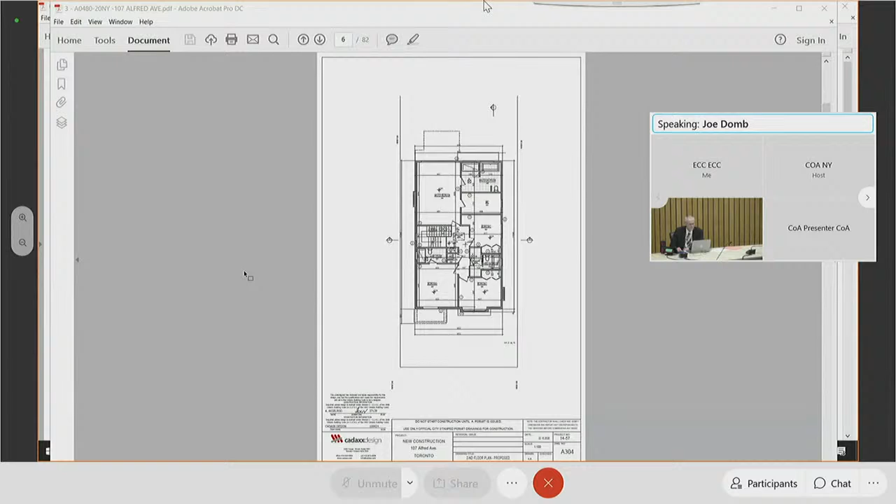The side main wall height, variances 3 and 4, was reduced from 8.5 meters to 8 meters, consistent with approvals on the street, for example at 164 and 174 Alfred, both of which have higher approved side main wall heights at 8.19 meters and 8.82 meters respectively. The third story variance, number 2, is technical in nature and will appear visually consistent with the streetscape as a 2-story dwelling. Planning agrees with this assessment, as stated in the planning staff report on file, and they have no objection to the variances proposed.

219 Hollywood Avenue, the street directly north, is an actual 3-story dwelling that was approved. The rear deck variance pertains only to a half-meter portion extending into the rear yard setback, and the deck does not have a variance pertaining to height or side yard setback. Nevertheless, the owners would like to put privacy screening around the deck to mitigate any privacy concerns from 109 or 105. The owners feel the variances for the proposed dwelling are minor in nature, with very little additional impact over what can be built as of right.

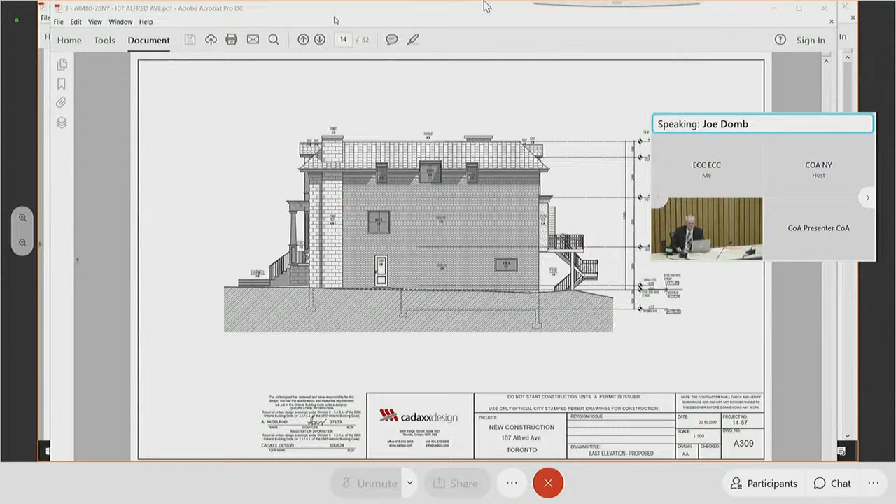I'd be happy to answer any questions you might have. Okay, thank you, sir. I'll go to the committee. Does the committee have any questions of the speaker? There being none, I'll move to our next person on the list.

I have Guy Tai Cho from 105 Alfred Avenue. Are you there, sir or madam? Hi, yes, hello. Can I get your full name and address, please? My name is Guy Jo, 105 Alfred Avenue, North York.

Miss Monica is supposed to represent us because my English is not fluent enough to represent my ideas in the best way. So if Monica can represent us, that will be the best to address my concerns. Mr. Chair, if Mr. Guy Tai Cho would like, we can put Monica on to speak on behalf of the neighbors. Yes, okay, that's fine.

Ms. Monica Goyal, are you there, madam? I am here, good morning. Can I get your full name and address, please? My full name is Monica Goyal, last name Goyal. My address is 201 Queen Street East, Toronto, Ontario, M5A1S2.

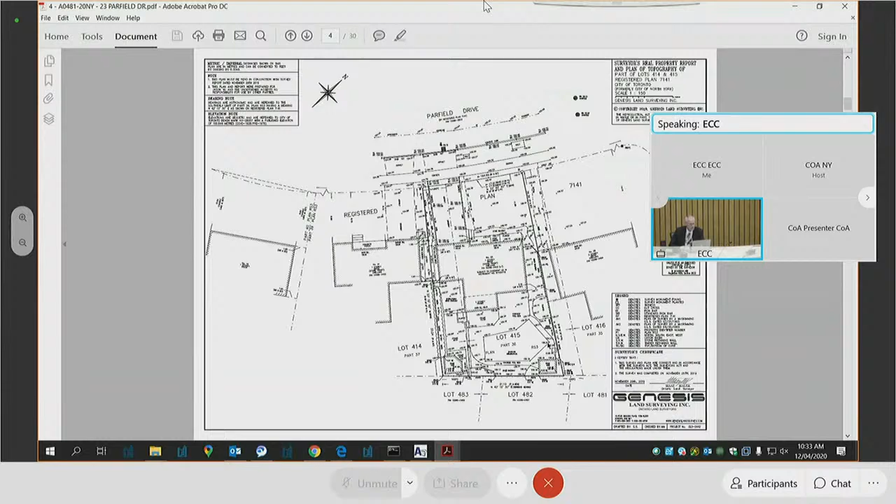Okay, thank you, sir. I think it's pretty clear what you're asking for. We have one variance before us relating to the west side yard setback. I noticed that there are no persons registered to speak on this item and no staff comments or recommended conditions. I'll just ask the committee if it has any questions or comments, or if it would like a presentation.

There being none, could I get a motion on the application, please? Mr. Khan, it's a minor variation, so I would like to move it to be approved. Someone to second Mr. Khan's motion? Mr. Kidd seconds. All those in favor? That motion carries unanimously. Mr. De Oliveira, your application's been unanimously approved without condition. Thank you very much, have a good day.

Item number 454 St. Clements Avenue. I have one person registered to speak, that is a Drew Laszlo. Are you there? I am indeed. Good morning. Yes, hello sir. Can I get your full name and address, please? Drew Laszlo, 3317 Yonge Street.

Thank you, sir. Pretty clear what you're asking for on the two variances we have before us, one for side yard setback and the other for the main wall height. I think the committee is pretty clear what you're asking for. I note that there are no staff comments or recommended conditions posted with this application. I'll just ask the committee if it has questions or comments or it would like a presentation.

There being none, could I get a motion on this application, please? Mr. Kidd? Thank you, Mr. Chair. In my opinion, the requested variances are minor in nature. I'd like to put forward a motion to accept the application without condition. Thank you, Mr. Kidd. Someone to second that motion? Mr. Hunt seconds. All those in favor? The motion carries unanimously. Sir, your application's been unanimously approved without condition. Thank you very much. Thank you, sir.

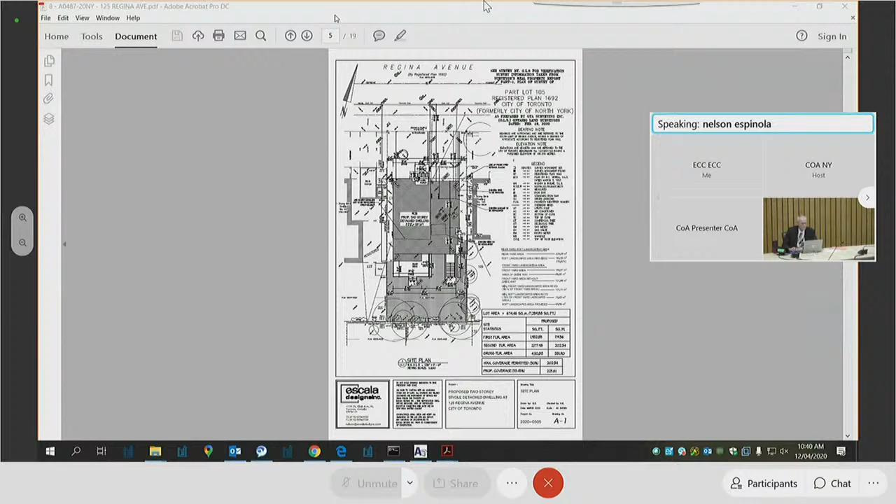I would like to point out that in terms of side yard setbacks and coverage, we're very much in keeping with what's been approved recently by the committee. There was an application at number 123 Regina, right beside us, which was approved with similar setbacks and coverage.

In terms of building height, we do not comply with the old zoning bylaw, and that's due to the fact that the crown of the road is actually 0.6 meters below the existing average grade. This is why we have a variance in regards to height.

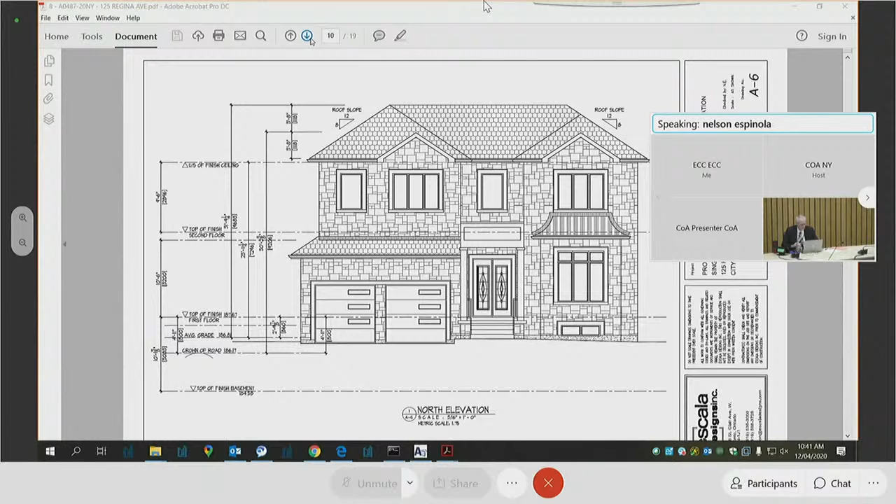But with regards to the new zoning bylaw, we are within the 10-meter maximum height. So I think that our variances are minor in nature, and again, in keeping with what's been approved in the area. Okay, thank you, sir.

I'll just ask the committee if it has any questions of the speaker. No questions. I have one person registered to speak on this item. That's Maria Gentile. Are you there?

Yeah, Mr. Chairman. Yes. Hi, madam. Can you please give us your full name and address, please? My name is Maria Gentile, and I live at 127 Regina Avenue, Toronto, M6A1R8. Okay, thank you, madam. If you could give us your comments on this application.

Basically, I just have objection to the height and the length and also the coverage of the whole house. I live next door, and I've lived there for 47 years, which is most of my life, and I don't plan to move anytime soon.

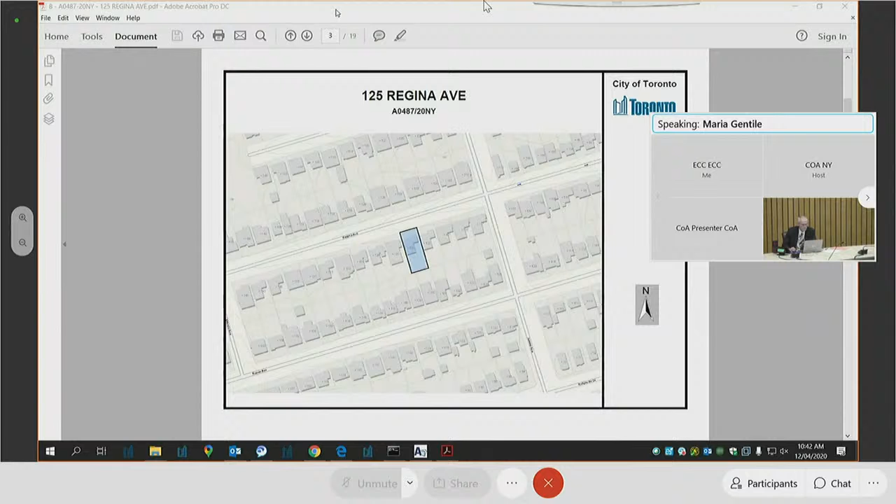The house next door to me would be at least 3 times as big. My house is about 1,800, and I see that this proposed house will be 4,110 square feet, pardon me.

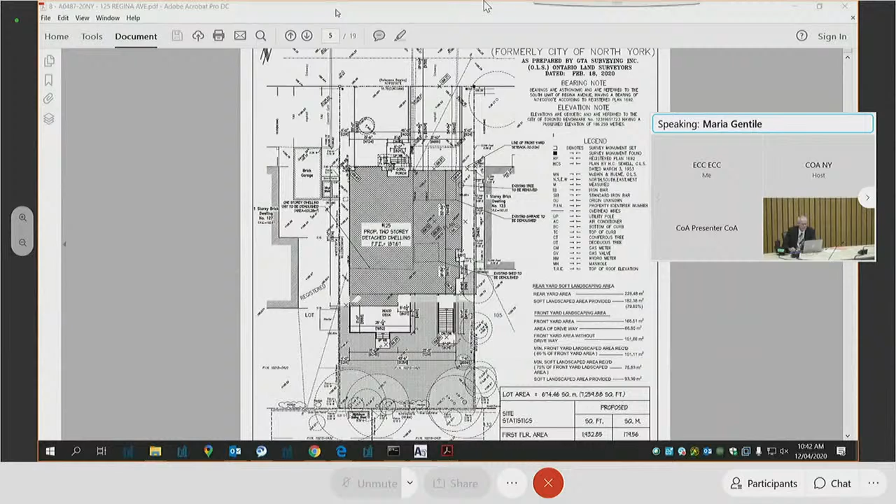That would impede a great deal, especially because they would like to move their yard on the west side closer to mine. We have a side patio on my east side, which is their west side. We use that patio quite frequently in the summer. My family enjoy the sun there.

We've planted roses for 47 years. We've had these roses there. We also have a vegetable garden, which would be overshadowed, needless to say, by the length of the house and the size and height of the house.

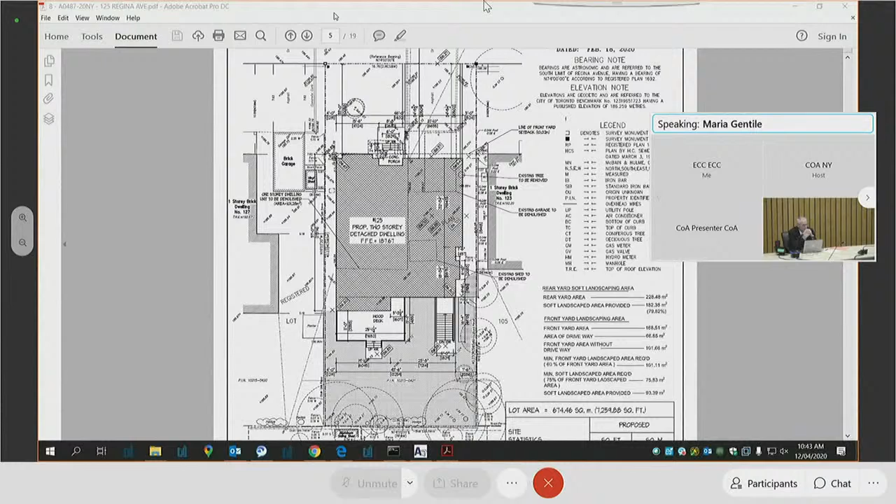We've always lived in the shadow of this big giant willow tree that they've had in their backyard. The former owner didn't exactly cut down any extra deciduous trees that grew, so the back of the property is full of these deciduous trees.

The willow tree for years has been sucking the water out of our garden. For the first time, when they cut it in January, we breathed a sigh of relief. And for the first time in many years, we've had a decent crop of whatever vegetables we planted.

So those are my objections. The overshadowing of our side patio would greatly limit our enjoyment of our backyard. The height would overshadow the morning sun. Nothing would come on our patio.

Basically, that's what we have in opposition to this big giant house. It takes up most of the land, and it's too big for the size of the lot.

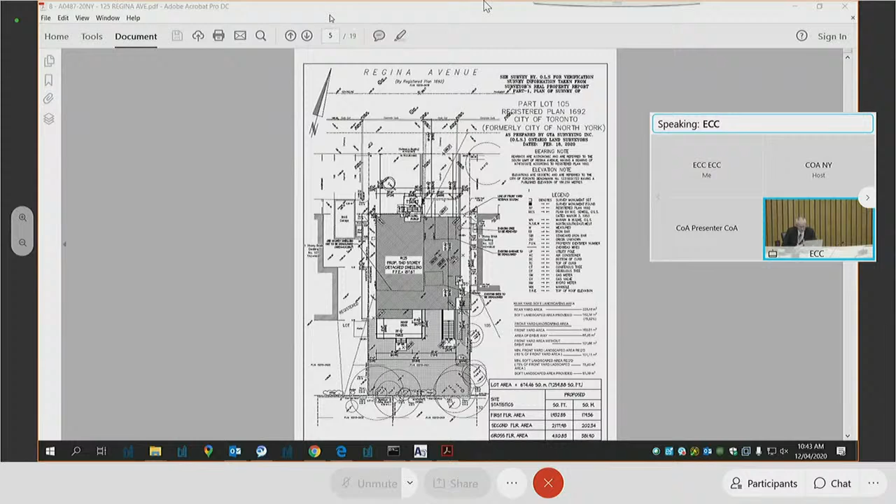Okay, madam, thank you. I just wanted to mention that the height, there is no height variance under the new City of Toronto bylaw. The only height variance they're asking for is related to an old North York bylaw that's effectively obsolete. I just don't know if you were aware of that. Other than the height, what they're proposing currently complies with the new City of Toronto bylaw.

No, I did not know that. Okay, thank you, I just wanted to mention that. Does the committee have any questions of the speaker? Being none, we'll go back to Mr. Espinola. Sir, are you there?

Again, in regards to height—yes, sir. Can you—you have already mentioned that. Do you have an opportunity to address the concerns raised by the previous speaker?

Certainly. As I was saying, with regards to height, we are in compliance with the new zoning bylaw. And with regards to the old bylaw, as I mentioned previously, the crown of the road is presently 0.6 meters lower than the average grade.

This is the reason why we're not in compliance with the old zoning bylaw. With regards to the side yard setback, the existing house is presently located at 1.2 meters approximately, so we're not reducing the side yard setback. It's presently 1.2, and we're maintaining that side yard setback.

With regards to length, we're slightly over, but for the most part we are within the 17 meters. It's only that little one-story addition at the back that brings us over the 17 meters, but for the most part we're within 17 meters.

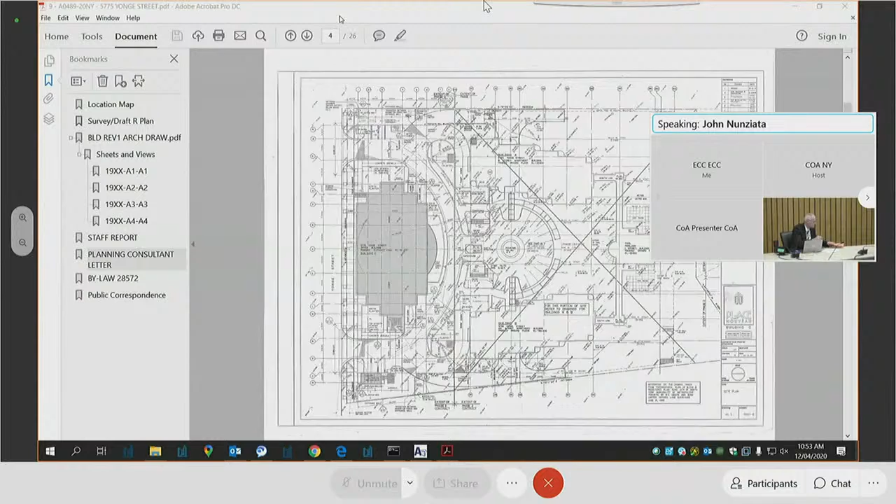Initially, the applicant, Anderson College, was told that there are no land use issues because the general zoning bylaw permits commercial schools. And then they came across the site-specific bylaw that was passed at the OMB in 1983, so 37 or 38 years ago. And it doesn't, the application says that commercial school is not permitted. Well, in fact, the nature of this application is not for a change in use, but to simply supplement the uses that are already permitted in the building. The uses permitted under bylaw 28572 are offices, business and professional offices, and professional medical offices.

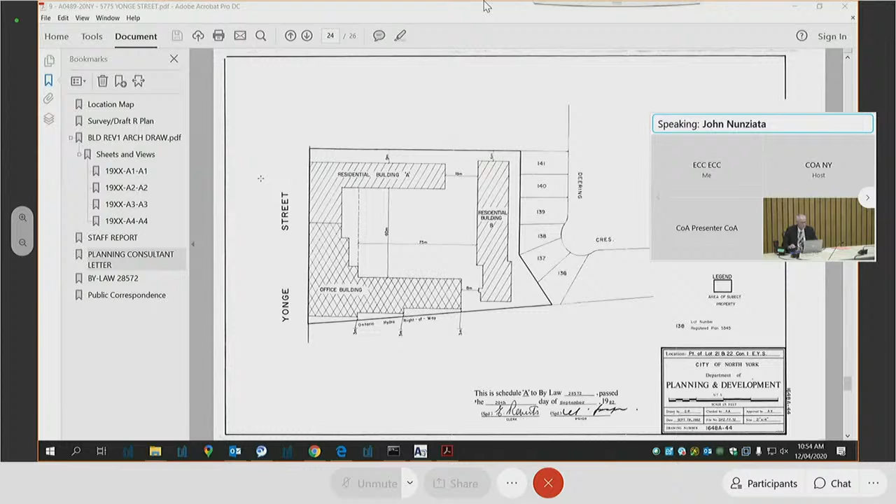And we have had conversations with planning staff. The local councillor, John Filion, has no issues with the application. And as planning staff points out in its report dated November 20th, the base C1 zoning bylaw permits a range of uses, which includes commercial schools. This particular building is in the C1 zoning bylaw. They also point out that this location is a significant commercial node, being within the vicinity of Finch Station, located directly south of Yonge Street and Finch Avenue.

The overwhelming majority of career college students are, for the most part, adults seeking a second career. A good number of them benefit from provincial assistance with a second career program to assist with tuition.

Planning staff goes on to indicate on page 2 that although commercial schools are not permitted under the site-specific bylaw, staff are of the opinion that the proposed use is compatible with the business and professional offices permitted by the base bylaw. And they go on to say that the proposed commercial school is permitted under the general C1 zoning bylaw. Finally, they conclude that the proposed commercial school is in keeping with the intent and purpose of the North York Secondary Plan, as well as the intent and purpose of site-specific bylaw number 28572 and base zoning. So in effect, planning staff supports the application in that the 4 tests, Planning Act tests, are met.

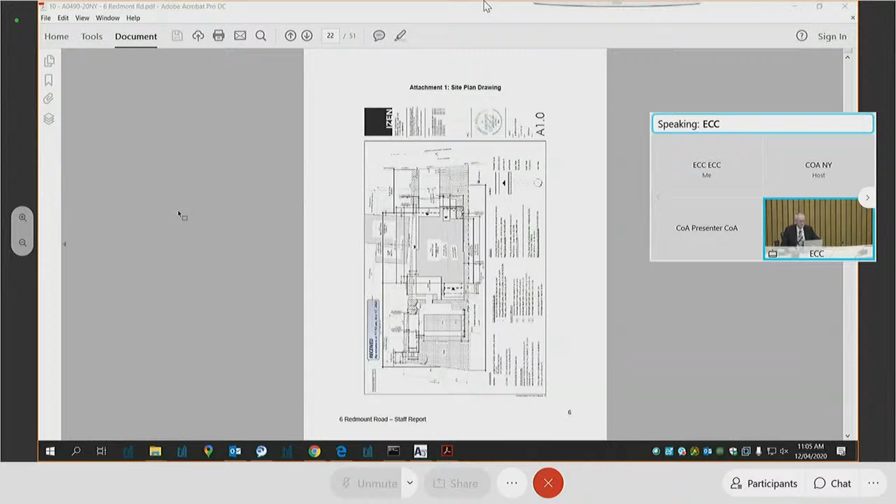Okay, thank you. I just wanted to note that the report also stated that should the committee see merit in the application, staff were recommending that the proposal be developed substantially in accordance with the site plan, basement floor, ground floor, second floor, west elevation, and east elevation drawings submitted and date stamped as received on November 17th, as attachments 1 through 6 to that report. So I just wanted to make sure you're aware of that. Yes, all of these changes are tied to that drawing set, and we're in full agreement with that condition.

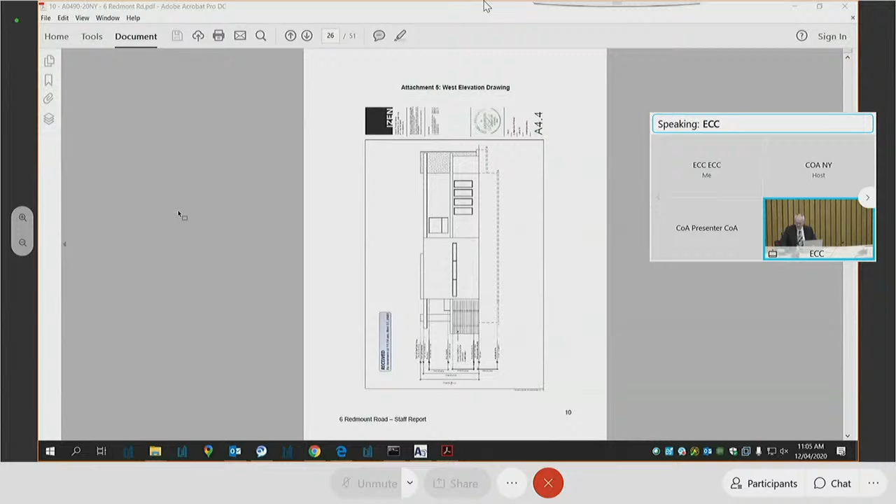Okay, if you could, madam, give us your brief presentation on what you see as the merits of your revised application. Of course. May I please ask staff to open my supporting material? I submitted a document. Okay, thank you. Photos.

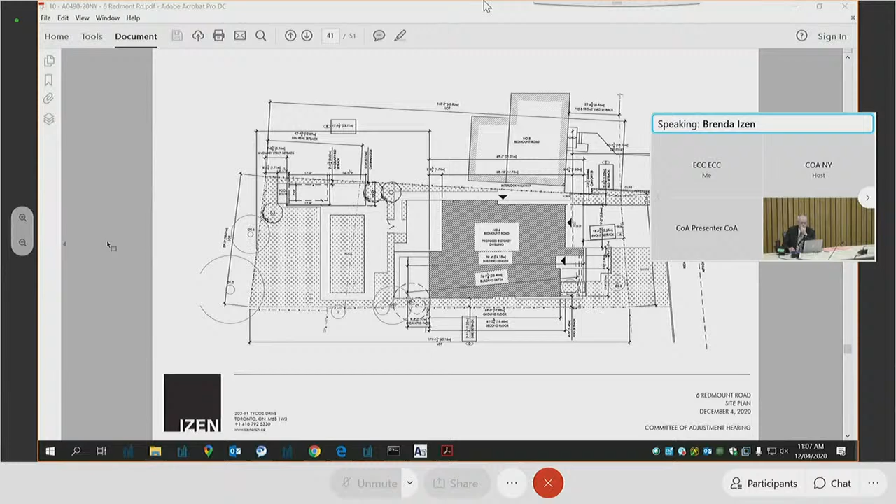For the front yard setback, the front wall of the house is actually in line with the adjacent neighbor, setback at 6.73 meters. But the front yard setback is being calculated to an architectural feature wall, which is that little pink area you see at the front. This is where the 5.55 setback comes in. As you can see in this diagram, it's a small percentage of the front wall facade.

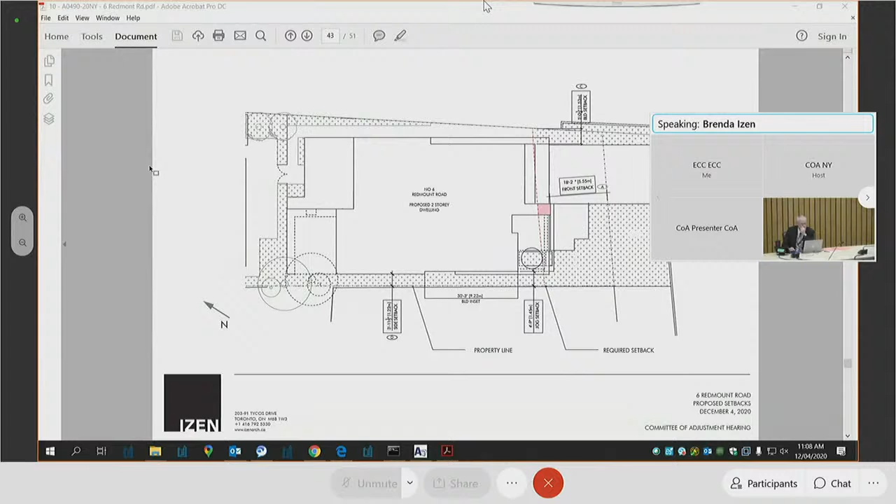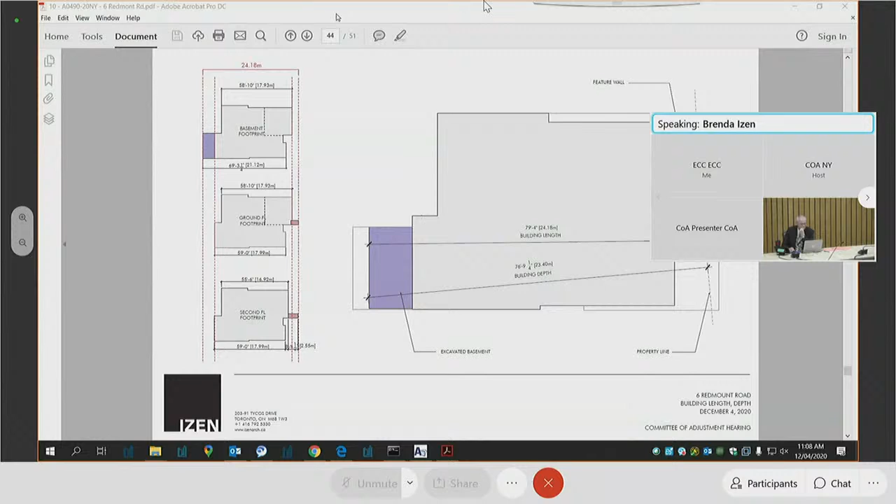Now if you can jump ahead to slide 5. This is for both the building length and depth variances. From the front wall to the rear wall of the house, above grade, the bulk of the building length is actually 17.99 meters. But our ask today is 24.18 because there are two components adding to this technical variance: the feature wall on the front adds approximately 2 meters to the length, and the basement extends beyond the rear wall of the ground floor to add another 2.97 meters below grade. This is also referenced in the staff report.

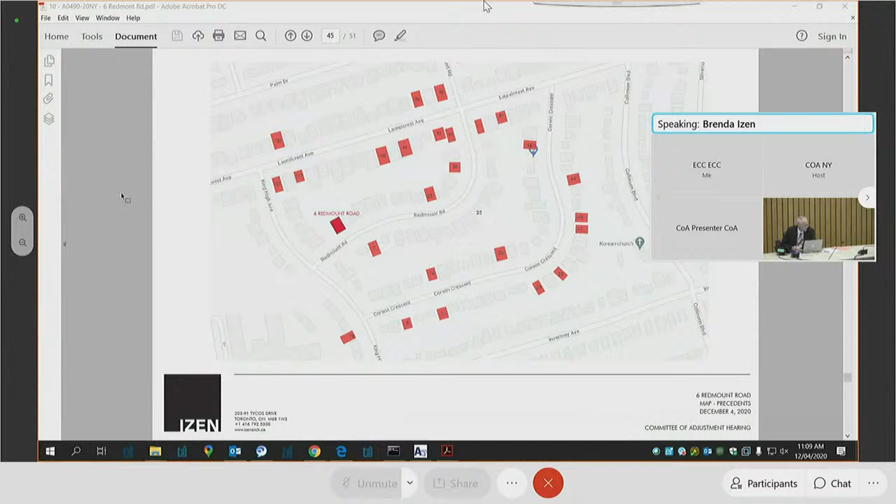I'll also add that we have 3 letters of support on file, and we received support from a 4th neighbor this morning, and we have no opposition from the neighborhood. I think that when you consider these variances in context, they're actually quite minor and consistent with the fabric of the neighborhood, and I believe this application meets the 4 tests. Thank you. Okay, thank you, Madam.

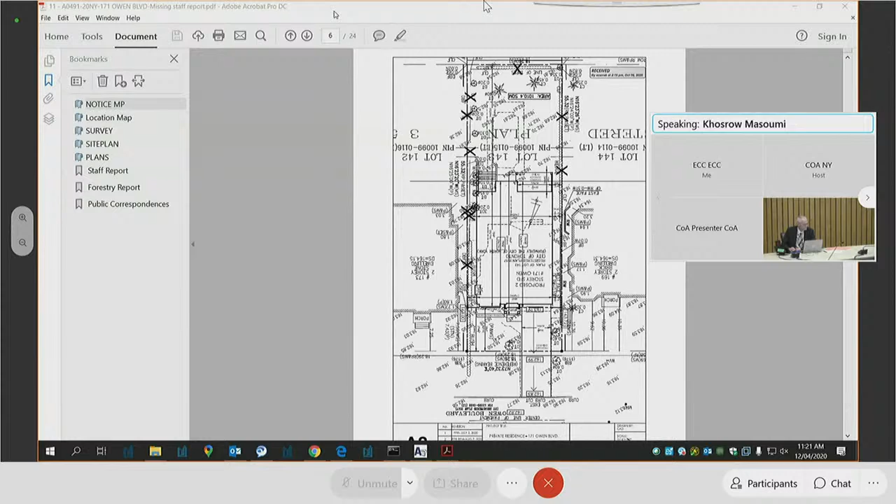Yes, sir. Okay, sir, if you'd like to give the committee a brief justification for your application and especially the revisions you've made. Yes. For the application in general, we're reducing the height to 10.5 so that we can accommodate the windows at the top of our building. They're actually decorative dormers, and they're going into the sidewall. This house is a classical French design where the roof doesn't have any eaves.

The walls extend up a little bit past, and there's a parapet. At the front of the house, there's no rooms up in that area. There's no third story here. It's just a straight two-story house.

The planning department has suggested it be refused as far as the building height goes, but we would like to have some small dormers across the front because that's the style of the building and the way it's designed. So we've lowered the height from 11.15 down to 10.5. In reality, we're only asking for a variance of about 1 foot 8 inches in extra height.

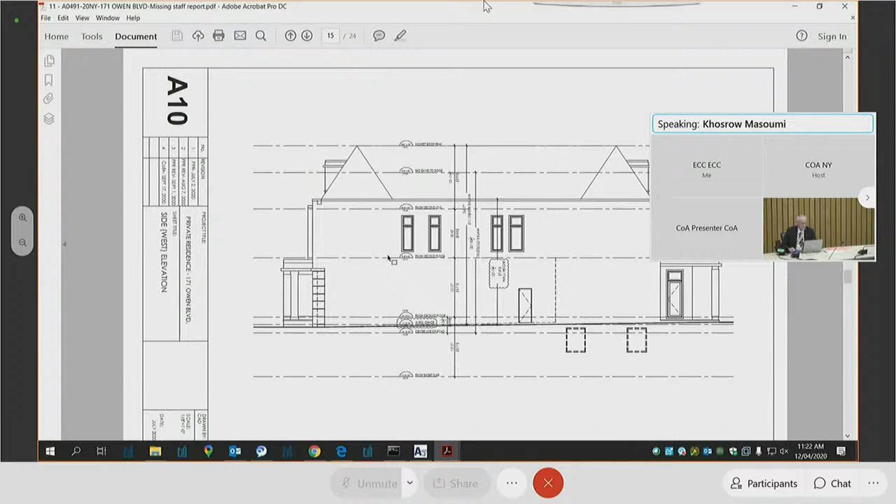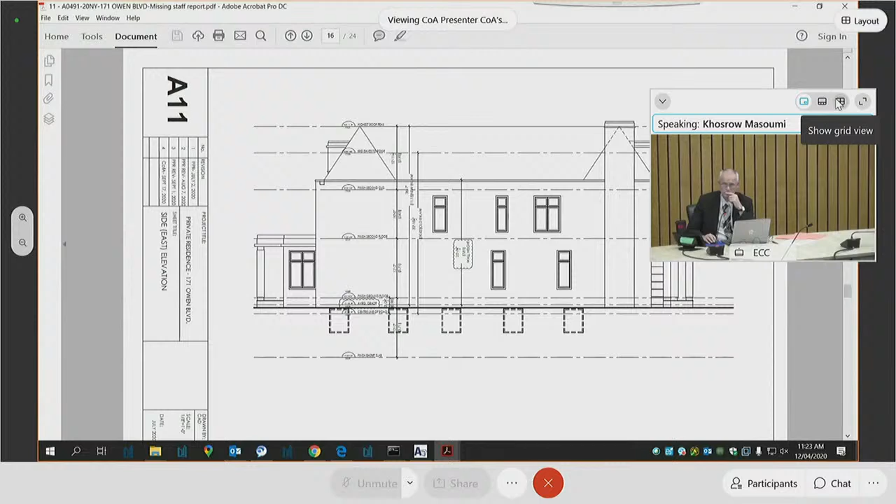Now we're dealing with the height of all sides, exterior side walls, and that's 7.81 where 7.5 is required - an extra foot. It's basically the parapet that extends above the side wall. Since there are no eaves, there's a parapet there that extends up and maintains the water running off the roof with a gutter inside it. That's the reason we're asking for the extra height from the side wall. The planning department has no objection to that.

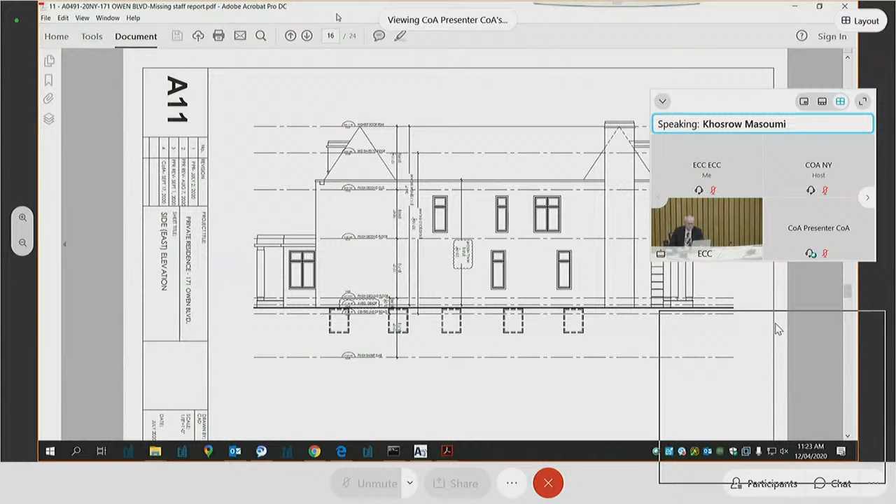Item number 3 is basically the same as the other side. The building length we changed to accommodate the planner at the city, and the building depth we changed to accommodate what she's looking for there. Both of those items in the report state that they're common with the new houses being built in the area.

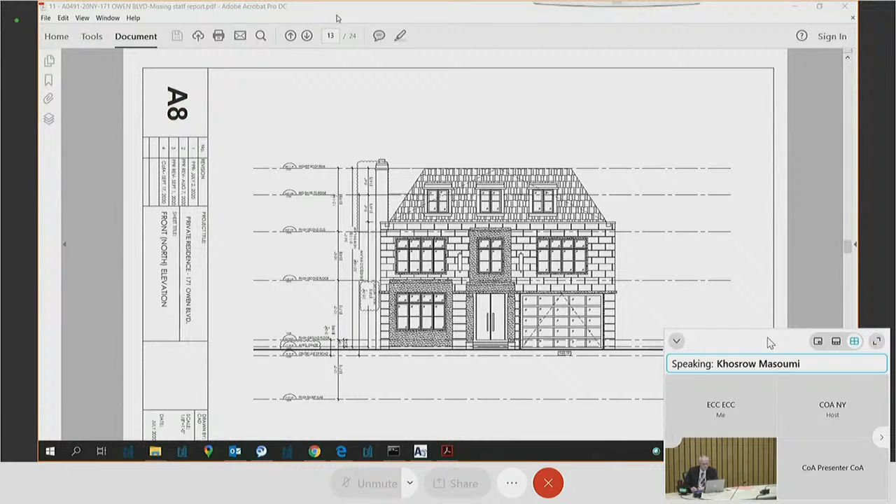So I would mention that this is a fairly long lot, like 180 feet deep. We comply with side yards to both sides. We comply with coverage. We comply with the front yard setback. Basically, we think all of the variances comply with the intent of the bylaw with relationship to the building length and so on. Thank you, if there's any further questions.

Does the committee have any questions of the speaker? There being none, we'll go to our next person on the list.

I have a Patrick Sue. Are you there? Patrick Sue, are you there? One more time, Patrick Sue, are you there? We'll come back to him. I have one person, just their first name - William, are you there? Mr. Chair, the person going by William has not called in. Okay, we'll go back to Patrick Sue. Are you there, sir?

Go ahead, Mr. Sue, you're live. I'm here, can you hear me? Yes, we can hear you, sir. Can I get your full name and address, please? Mr. Sue, you are live and we can hear you, so please go ahead and speak. Mr. Sue, can you proceed? Mr. Sue, we can hear you. Mr. Sue, are you there? Can you hear us? Mr. Sue, are you there? I'll give you one more time, then I'm going to have to cut you off. Mr. Sue, are you there? Mr. Sue, you are live, you are present, and you are unmuted. Please speak if you have something you'd like to say.

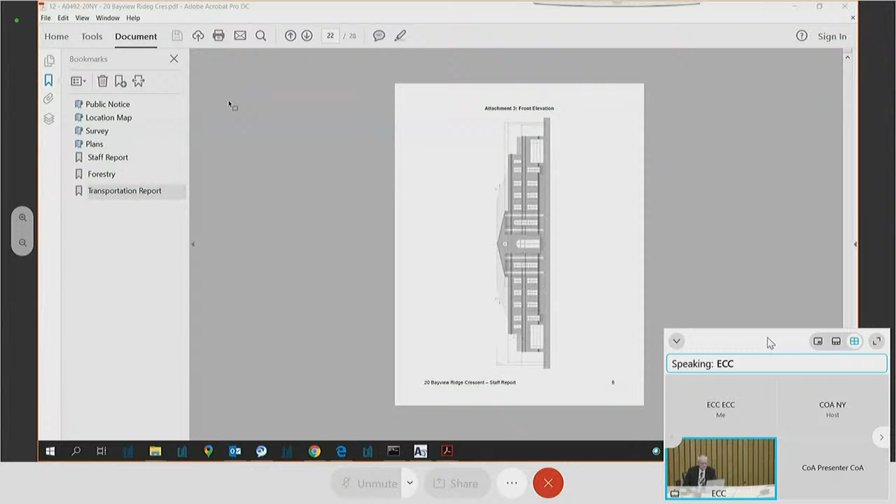Yes, and I was going to ask you about that. Would you like to defer the application to deal with urban forestry? They had some concerns about a potential impact on bylaw protected trees.

Through you, Mr. Chair, I'm of the opinion that the application is capable of being heard today. I've worked closely with planning staff and transportation staff and attempted to reach out to urban forestry. Urban Forestry advised me that comments would be provided on the application formally, which was on November 27th, the deadline to submit documents for this application. We've been in the queue since September 25th, 2020 to get scheduled.

Any tree in question for this application will need a permit in order for this application to be ultimately approved and construction to take place. So I'm of the opinion that this application can be heard today. Standard conditions 1 through 3 can be added to deal with urban forestry concerns following an approval here today.

Okay, thank you, sir. So you understand the risks of going forward. If you run into problems with urban forestry, you could be before city community council. Absolutely, Mr. Chair, and any approval with any city or private-owned tree that's within the regulated bylaw needs to obtain a permit to construct. We're fully aware of that and willing to work with urban forestry to satisfy any of their concerns.

Okay, thank you, sir. It's pretty clear what you're asking for in your application, sir. I'm just going to ask the committee if it has any questions or comments or would like a presentation. There being none, please note we have no other persons registered to speak on this item, so if I could get a motion on the application, please.

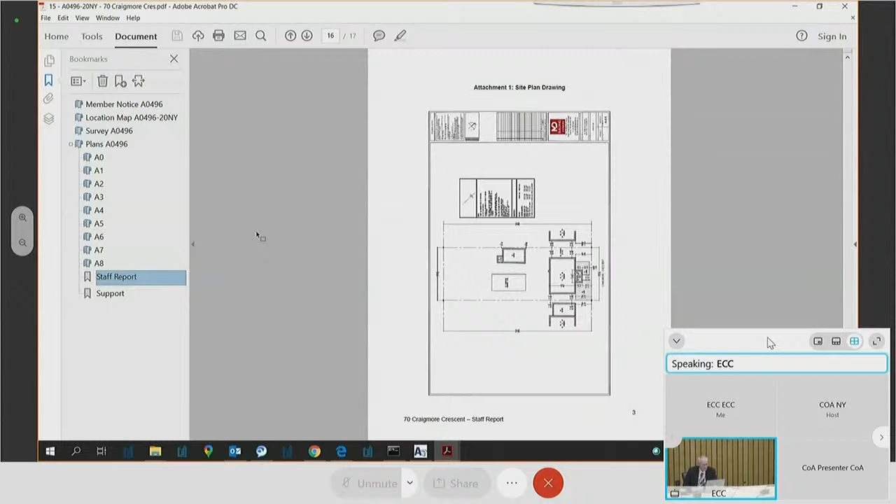I don't know, but it sounds good. No, we're having trouble hearing you, your voice is breaking up. Can you hear me now? Okay, you have one variance before us, it's related to a front yard setback. It's pretty clear what you're asking for.

I'll just ask the committee if it has any questions or comments or would like a presentation. Please note that no one else is registered to speak on this item. If I could get a motion on the application, please. Mr. Hunt? Thank you, Mr. Chair. I believe that this application is very straightforward, and I believe it meets the 4 tests under the Planning Act, so I would recommend acceptance.

Thank you, Mr. Hunt, someone to second. Oh, it's subject to city planning condition. Yes, sorry, you're right, as you identified. Okay, thank you. Someone to second Mr. Hunt's motion? Mr. Khan seconds. All those in favor? Motion carries unanimously. Sir, your application's been unanimously approved, subject to city planning condition.

Chairman, thank you. Item number 16, 135 Laurelcrest Avenue. I have one person registered to speak, Abhijan Jamali, are you there? Morning, Chair. Yes, I'm here.

Yes, hello sir. I wanted to ask, there are a couple of reports here, I wanted to find out if you've read them. There's one from Transportation Services dated the 27th of November. They indicate that they have no objection to the application, provided you add a notation on your site plan drawing that states all portions of existing site access driveways that are no longer required must be closed and restored with soft landscaping and full concrete curbs to the satisfaction of Transportation Services. And City Planning had a report that states that they have no objection to your application, provided that the proposal is developed substantially in accordance with the site plan drawing and side elevation west drawing submitted to the Committee of Adjustment attached as attachment 1 and 2 to their report. Did you have an opportunity to look at those 2 reports, sir?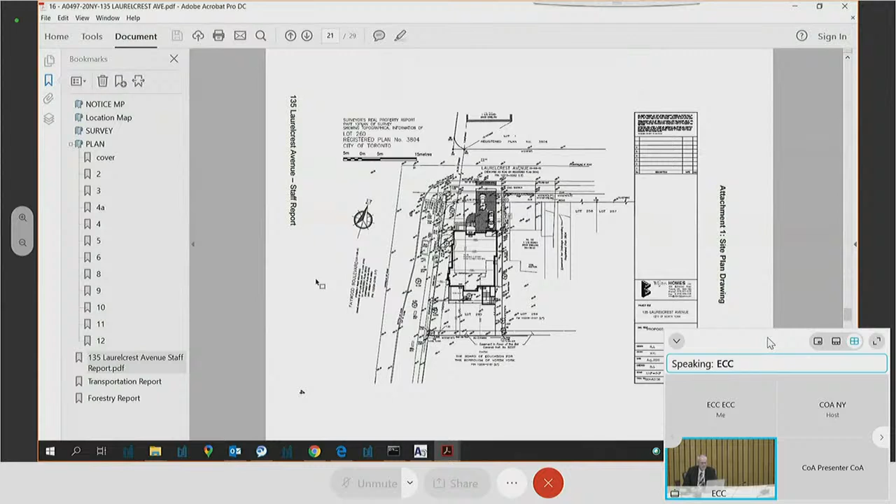Sir, are you there? Mr. Jamali, are you there? Mr. Jamali, please do not mute or unmute yourself, I will be responsible for doing that. Mr. Jamali, are you there? I am here. Yes, Mr. Jamali, have you read those 2 reports from Transportation Services and City Planning? Yes, I have. Please do not mute yourself or unmute yourself, I will be responsible for that. Okay, did you read those 2 reports? Yes, I have read them.

Okay, thank you. It's pretty clear what you're asking for in the variances we have before us. I note that there's 4 of them, but they're pretty clear in what you're asking for. I'll just ask the committee if it has any questions or comments or would like a presentation.

Mr. Hunt? Thank you, Mr. Chair. Through you to the applicant, I noticed on the file there was one concern expressed regarding the visual impact of the deck. Have you had an opportunity to speak to your neighbor about this?

Yes, I did. I discussed with her and I assured her that I have no deck and no side door on the east side, which is concerned. My deck is on the west side and I don't have a side door. All right, thank you very much.

Okay, thank you. Could I get a motion on this application, please? Please note that I have no other persons registered to speak on it. Mr. Kidd?

Thank you, Mr. Chair. I think the proposed variances are minor in nature, and I'd like to put forward a motion to accept the application subject to the planning staff condition that you previously read into the record, subject to the transportation services condition that you had previously noted, and also subject to the forestry condition.

Thank you, Mr. Kidd. Ms. Sankar seconds. All those in favor? The motion carries unanimously. Sir, your application is unanimously approved, subject to urban forestry, transportation services, and city planning conditions. Thank you, Mr. Chair and members of committee.

Item number 17, 79 Blythewood Road. I have one person registered to speak, that is Andy Nasr. I hope you're there. Are you there, sir? Mr. Nasr, are you there? I am here, can you hear me? Okay, yes, I can hear you, sir. Thank you.

I wanted to ask, sir, if you have had the opportunity to read the city planning report dated the 16th of November. They indicate that they have no objections to your application, provided that the 21-meter length applies only to the first floor to accommodate the one-story sunroom addition. The second floor of the dwelling should comply with bylaw requirements. Have you had the opportunity to read that report?

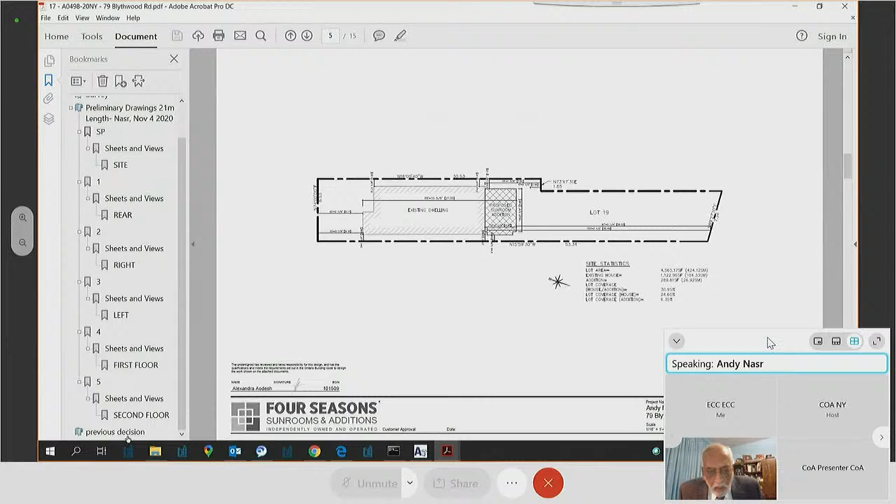So as it stands, there's a very long backyard. And the existing floor space is not 0.35, it's 0.46, which was a variance that was granted at the Committee of Adjustment when we renovated the house about a year ago, 18 months ago. Okay, and the increase, sir, is because of the sunroom addition, correct? Exactly, only the sunroom addition.

Okay, thank you. Any further questions of the speaker? Mr. Chair, if I would like to rehear, what is it, 0.53, or have you modified it? No, it is 0. Sorry? Mr. Nasr? Oh, sorry, were you talking to me? I'm sorry, I can't hear you that well.

Okay, Mr. Khan, so what is it now? Mr. Khan, can you repeat your question? Sir, my question is to Mr. Nasr, what is the present floor space index at the moment? The present floor space index is 0.46 roughly, and the proposal is 0.53. It's 0.46 is the existing FSI, and he's requesting an increase to 0.53. Okay, thank you, sir.

Any further questions of the speaker? Can I get a motion on this application, please? Ms. Sankar? Yes, through you, Mr. Chair.

I accept the explanations provided here by the agent today, and so I will move to approve this application, and I'll make it subject to the November 16th staff condition around the 21-meter length applied only to the first floor to accommodate the one-story sunroom addition. The second floor of the dwelling should comply with the bylaw requirements. And that's my motion.

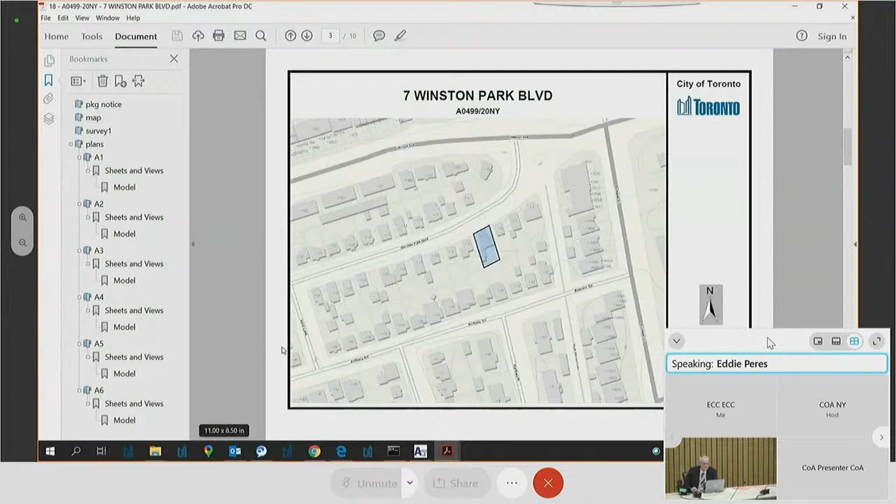Yeah, okay. We went a few months back to see the property, and this accessory building garage was already existing. So I told the owner he wouldn't comply with the building zoning, and that we would have to go to Committee of Adjustment to get it approved.

So we're before you trying to get approved a structure that's already existing. It has eaves that are right on the property line. I saw the neighbor's letter pertaining to the gutter. We are willing to take the gutter and move it to the back so it would discharge on the backyard instead of on the side, eliminating that issue with water on the neighbor's property.

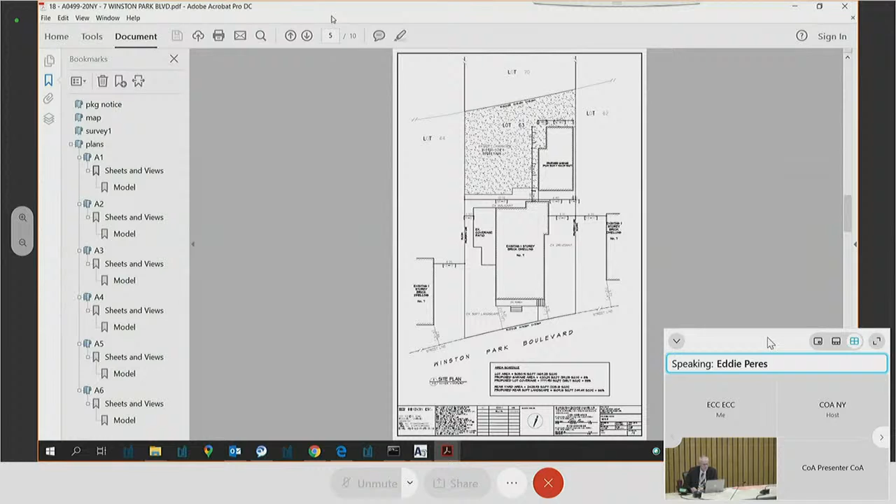We're just proposing to maintain something that was built without permits, and the variances we're requesting are minor in nature and meet the 4 tests. The only thing is that the owner had done it without permits, and planning has no issues with the proposal.

Okay, thank you, sir. I'll ask the committee, does it have any questions or comments for the speaker? There being none, we'll go to the next person on the list.

Mark Dodaro, are you there, sir? Yes, I'm here. Can I get your full name and address, please? It's Mark Dodaro, address 36 Crossburn Drive, Toronto, Ontario, M3B 2Z2. Okay, thank you, sir. Could I get your comments on this application?

Yes. Good morning, Mr. Chair and the committee. My name is Mark Dodaro. I'm representing my father, Ernest Dodaro, who owns the property at 9 Winston Park Boulevard, the neighboring property to the west, adjacent to the subject property. The proposed application before you this morning poses several different challenges and issues with regards to the way it was built.

Construction quality, the fact that it was done without permits, without oversight by a city inspector. As a result, it was overbuilt in terms of floor area and height, with no regard for setbacks from the property boundaries, and a blatant disregard for how it would affect the neighboring property now and in the future.

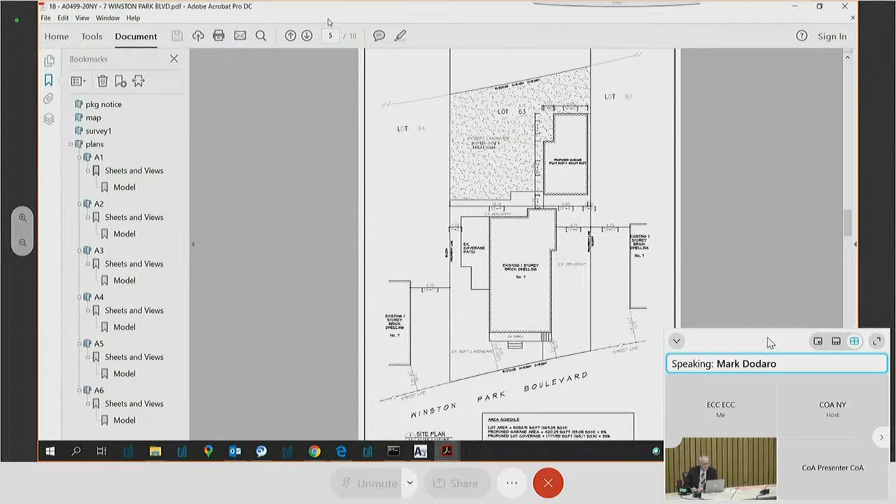Our consultant specifically outlined that in accordance with the bylaw, any structure over 100 square feet or 10 square meters requires a minimum setback from the property line of approximately 1.8 meters, which currently it is not. As per the application, it's currently set back a mere 12 inches from the property line. The awning and eaves encroach to the property line, as discussed.

In this case, any future development or construction on our side of the property is negatively impacted, as well as the value of the property. We would need additional shoring at the angle of repose, which would cost an estimated $15,000 to $25,000. This expense we would never have had to incur if it was built properly and in accordance with the bylaws.

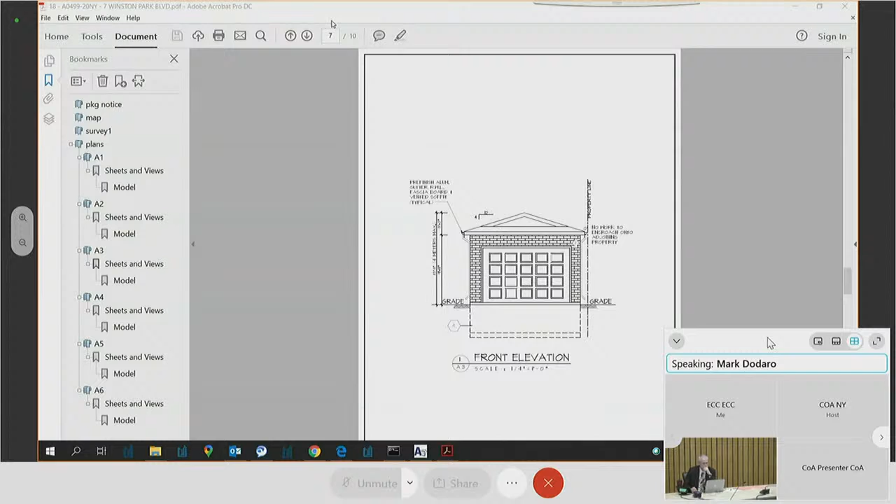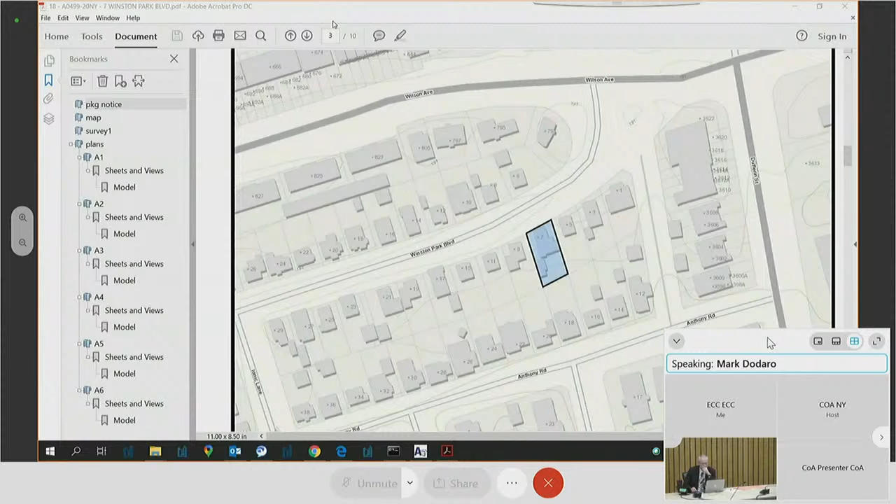Furthermore, there is an additional structure added to the rear of the garage, which now forms an even larger floor plate not included in the drawings put forth today. Pictures of the structure were sent to the Committee of Adjustment, and you can plainly see them on Google Maps overhead view. The issues mentioned were most concerning to us, but there are other concerns I'd like to point out.

One is the water egress from the 2 additional eaves troughs. They were installed 6 inches from the property line, and it creates a swamp-like river in my father's backyard. The second issue is the west side of the structure was not finished.

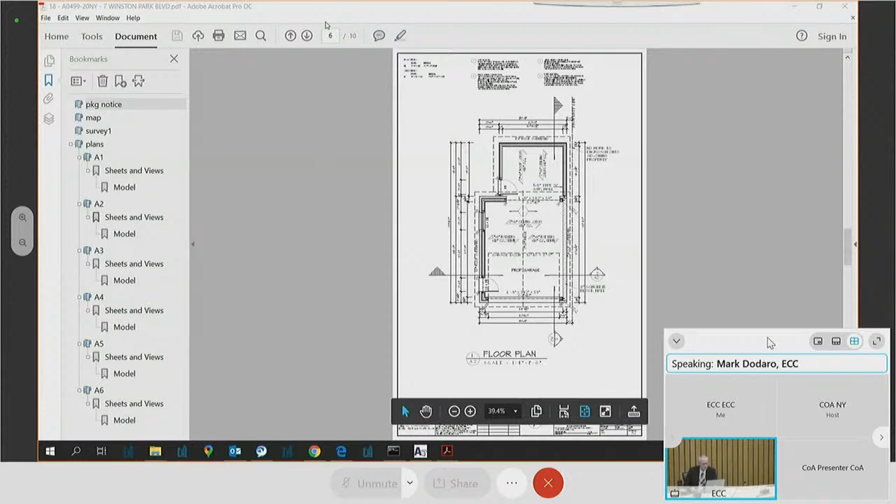The three sides of the structure are finished in brick, and frankly, it's an eyesore to look at. Because a permit was never granted and no elevation drawings provided, there's no accountability to finish this side—the side that faces our house.

In summary, we feel strongly that the approach taken by our neighbor to build first and ask for permission after the structure was built is not only abusing our system the way it works, it's also bullying the neighborhood in order to achieve what he initially set out to do. The other question would be, if this structure is approved on this basis, what precedent is this setting for future developments requiring permits in the neighborhood?

Thank you, Mr. Chair and committee.

Just to state, sir, that the committee doesn't deal in precedents. Every applicant who comes before us has to stand or fall on the basis of their own argument, not on what exists in the neighborhood. I'll just ask the committee, does the committee have any questions of the speaker?

Being none, we'll go back to Mr. Peres. Mr. Peres, you've heard the comments. If you'd like to respond, please.

Yeah, hello again. As per the point the gentleman was making that we didn't include the back portion—the back portion is on the drawings. As you can see, it's showing the garage in front, and the frame portion is shown at the back. We did show it, and it's too bad it was already built. We could have built the garage a little further back and wouldn't be before you, but because the garage was already built, this is what our hand was dealt with.

We are willing to take the gutter and make sure it discharges all onto the owner's property. I can indicate it on the drawings when we go for building permits, and you can put it as a condition, so that it wouldn't discharge any water onto the neighbors.

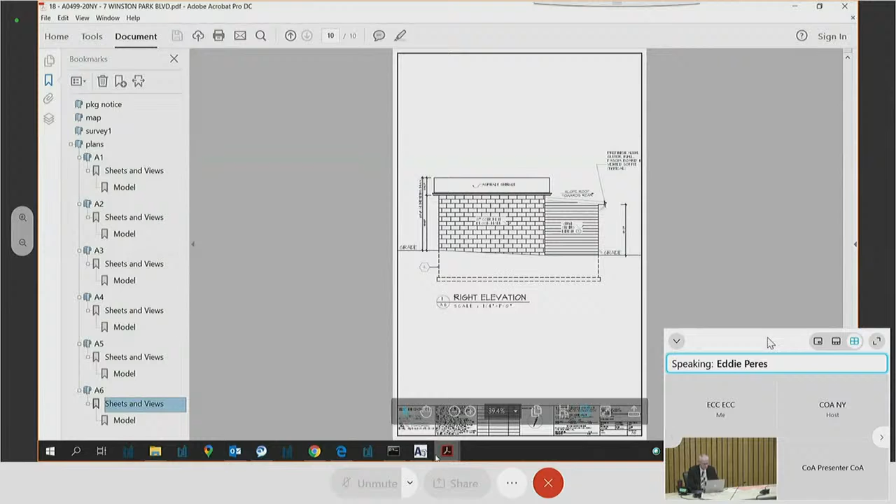Also, as per the concrete block, if the neighbors like, I can have the client finish it with stucco, so you have a nicer finish on that side. I can assure you the client will be willing to do that as well, so instead of seeing blocks, he'll be seeing a nice stucco wall.

Okay, that's another thing we can add to it if we have no problems. Mr. Peres, I just wanted to ask—when I was out looking at the neighborhood, I noticed there are a number of garages on the street situated in the same location as your client's, at the end of their driveway. That's not an unusual configuration for this neighborhood.

Yeah, that's correct. We're at 1.46 instead of 1.8 meters from the house—that's what creates one of the variances. All the variances we're asking for are minor in nature. Thank you, sir. Any questions of the speaker?

Mr. Hunt? Through you, Mr. Chair—can you tell me how long after the original garage was constructed the add-on was?

I think it was maybe a couple of months later. I couldn't tell you 100% because I never asked the owner that. I just went there and it was all existing when I arrived, and I measured it, and everything was built per code. The blocks went down 4 feet, at the frost line. Everything was nicely built, 8-inch concrete block. The roof was all built properly according to code. As per the back addition, I'm not 100% sure, so I can't tell you on that 100%.

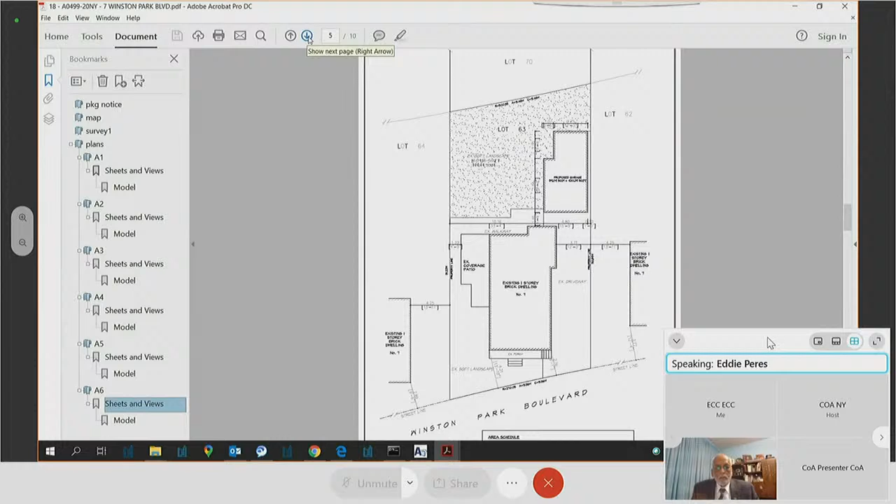But as per the proximity of the garage, the way the door is positioned, the owner has enough room to put the car in and out of the garage with no difficulty whatsoever. The garage door is pushed to the side, and the car fits with no problems. It doesn't affect entrance or have any impact when the gentleman is parking the car.

Well, sir, I have to tell you that it is not before us, but when you go for a building permit, you will have a problem.

Well, it's not an unusual situation. I know it should have been 1.8, but the difference is only 34 centimeters, which is barely over a foot. It is what it is now. I agree with you, it would have been nice if they had put 1.8, but what's existing at this point is 1.46, and it's only a 34 centimeter difference of what the zoning bylaw requires.

Thank you, sir. Any further questions? You're welcome. There being none, could I get a motion on this application, please?

Mr. Hunt? Mr. Chairman, having listened to the applicant and the explanation, or the answers to the questions I asked, and also the concerns expressed by the immediate neighbor, I have difficulty believing this should be approved. So I'm going to move that this application be denied.

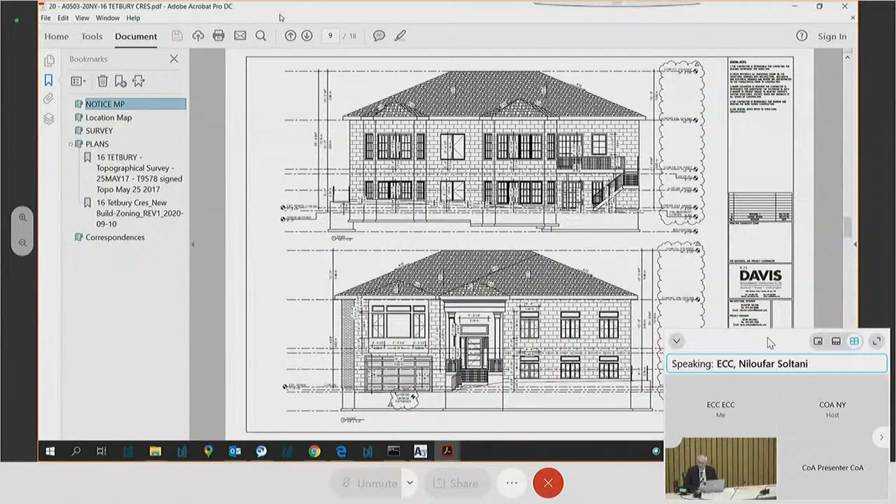Okay, thank you, madam. Any further questions of the speaker? Being none, could I get a motion on this application, please? Ms. Sankar?

Through you, Mr. Chair, I accept that explanation provided by the agent here today. So I'll put forward a motion to approve this application as is. Can I have someone second that motion? Mr. Khan seconds. All those in favor?

Mr. Hunt, are you in favor? I've lost your video. Mr. Hunt, we've lost him. So anyway, we have enough for quorum on that motion. Mr. Hunt, were you in favor? Yes. Okay, thank you. That motion carries unanimously.

Madam, your application's been unanimously approved without condition. Thank you so much. Thank you.

Now on to item number 21, that is 24 Shouldice Court. I have three people registered to speak. The agent is Ali Shakiri. Mr. Shakiri, could we have the two other persons registered to speak? If you could give us a brief presentation on what you see as the merits of your proposal. Please note there are no comments or recommended conditions from staff on your application.

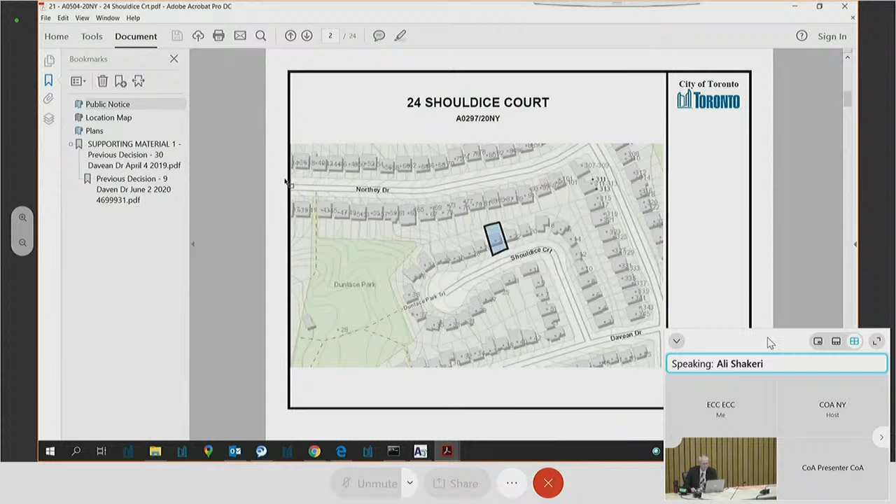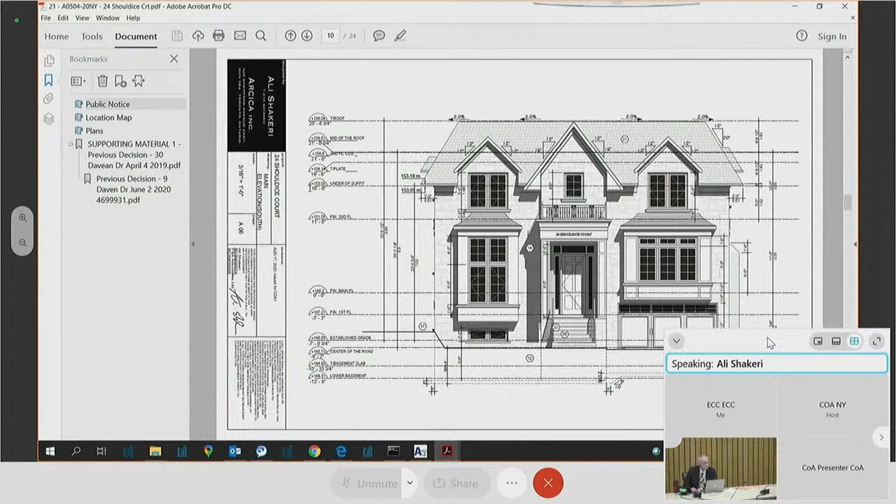Thank you, sir. So it's a single dwelling. As you can see, we are asking to increase the coverage slightly to 32.5%. There is a variance for the wall height, that's for the east side only, and that's only for the window, actually, not for the entire wall. Actually, east and west side for the windows, not the entire wall. And there is a slight increase of the building height under the old bylaw, that's only 10 centimeters. So I assume it's very straightforward.

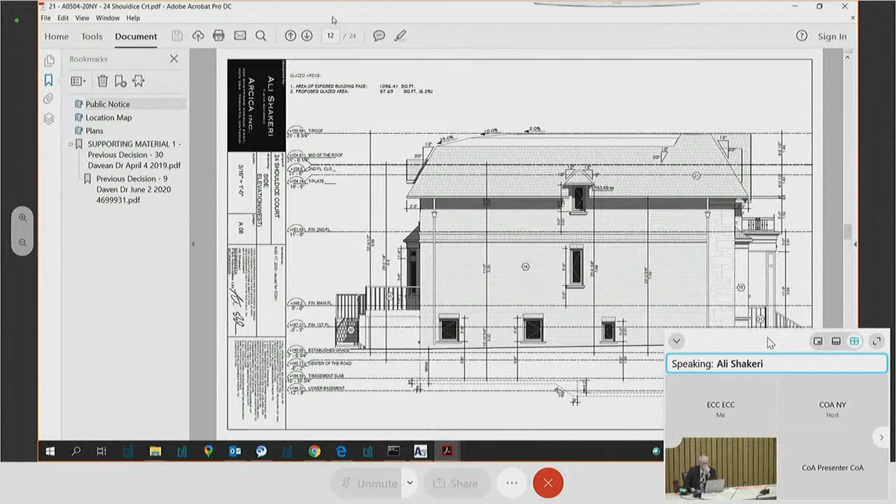Basically the side yards actually are more than what the bylaw requires. It's a 6 foot minimum, but we are more than 6 foot on the side yards by about 30 centimeters. So I find it very straightforward, but if there is any question, I'd be more than glad to answer.

Okay, thank you, sir. Any questions of the speaker? Being none, I'll go to our first registered speaker. I have Melanio Catre. Are you there? I'll come back to you.

I have a Linda Goldberger. Are you there? Yes, I'm here. Can I get your full name and address, please? Linda Goldberger, 26 Shouldice Court, next door. If you could give us your views on this application?

I was only given this application. I haven't been spoken to at all by the powers that be in terms of the architects or whatever. But my concern is that if they're supposed to be 30% coverage, I don't feel comfortable it's going up to 32.5. Each variance seems to be taken advantage of, and that's just my only complaint. Okay, thank you. Any questions of the speaker?

I'll go back to our previous registered deputant, Melanio Catre. Are you there? Mr. Chair and members, they are present, they are unmuted, so they are able to speak right now. Melanio Catre, are you there? Can you hear us? One more time and then that's it. Melanio Catre, are you there? Okay, take them off. Take them off, Elizabeth.

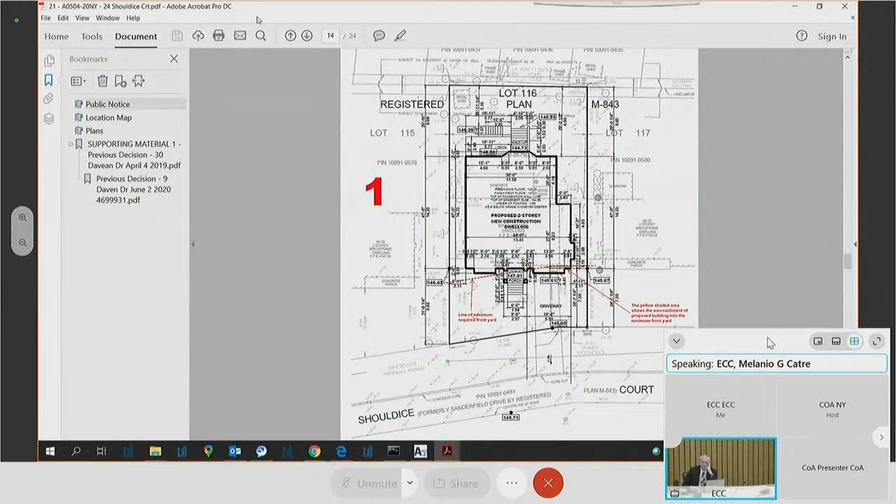Yes, sir, thank you. While I was listening to the comments by the neighbors, my colleagues are telling me that there is an inconsistency between the public notice and the waiver that we submitted. That's why I was a little bit puzzled a few moments ago. We asked for a front yard variance as one of our variances under the waiver, so that variance changed with the sidewall. Variance number 3, while it's showing the correct section, no, it doesn't even show the correct section number. So variance number 3 is changed. I don't know why, but it's not reflecting the waiver that we submitted. I'm not sure if we can change it on the floor here, or do we have to defer.

Sir, are you proposing to change variance number 3? Yes, we had asked that our variance number 3 under the waiver was the front yard of 7.5 meters, whereas the minimum required is 7.82. When I read the variance number 3 here, it's not showing that, and that variance is nowhere else on this notice. So I think there is some discrepancy between the variances that we requested.